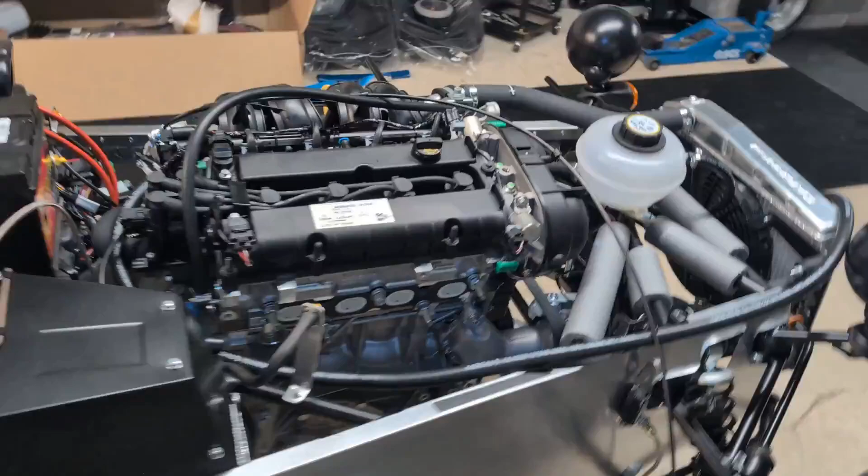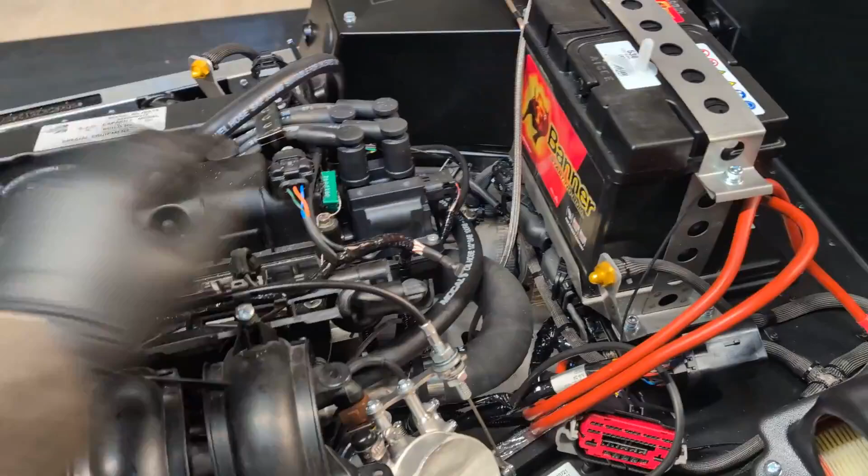It's quite a bit of the plumbing done, quite a bit still to go. Connected a few of the loom connections and whatever else, but again, still some work to do. Throttle cables kind of roughly mapped out. But yeah, still some work to do up in the engine bay, but the kind of stuff that we needed many hands for is hopefully done on that front.

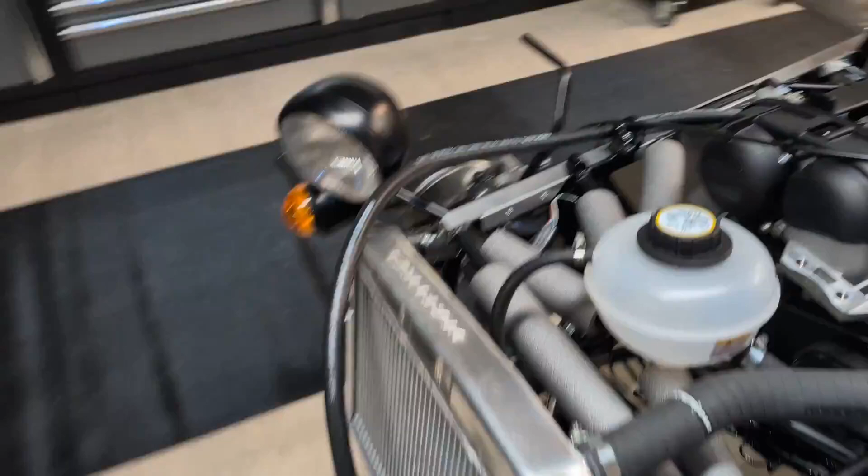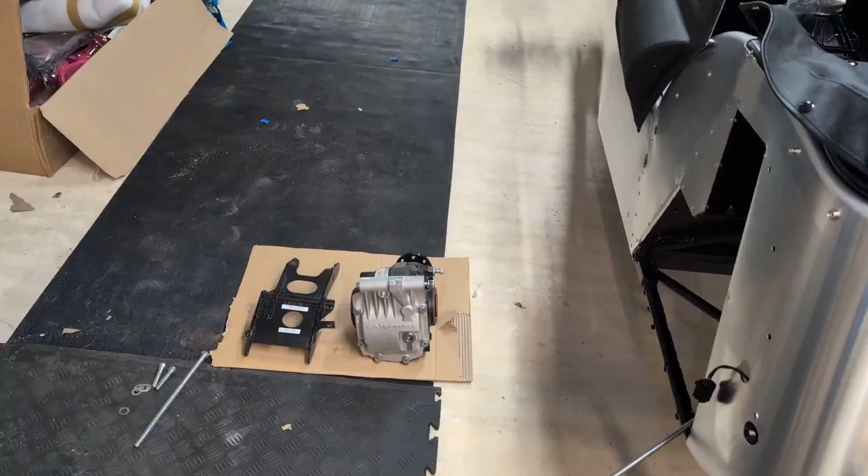Spent the last hour or so of the engine install day playing around with the rear diff. It's one of the things you'll read about and hear about a lot if you're building a Caterham. It's mainly because the thing's so heavy, it weighs a ton, so getting it lined up when you're supporting that weight is not the easiest.

We had to play around with a few things last night, and some of them, even though they're not in yet, I can tell already are pretty good things to bear in mind, pretty good tips. So I'll document them here, and if they turn out to be nonsense, after I've fitted the diff, I'll come back and correct myself.

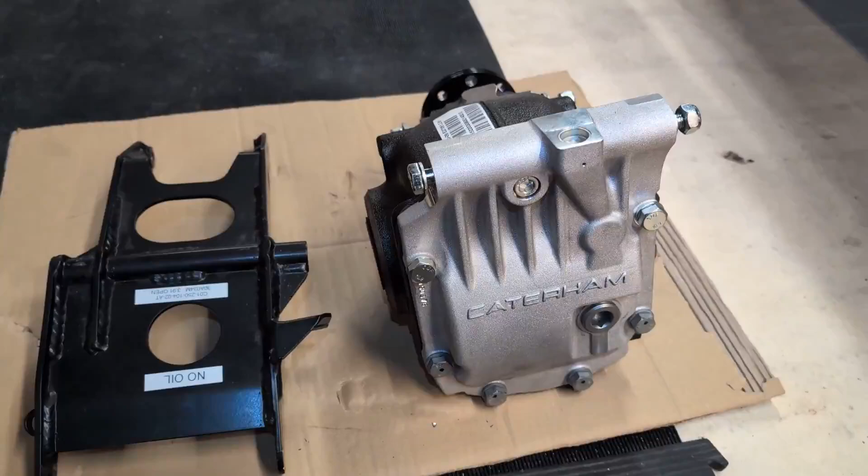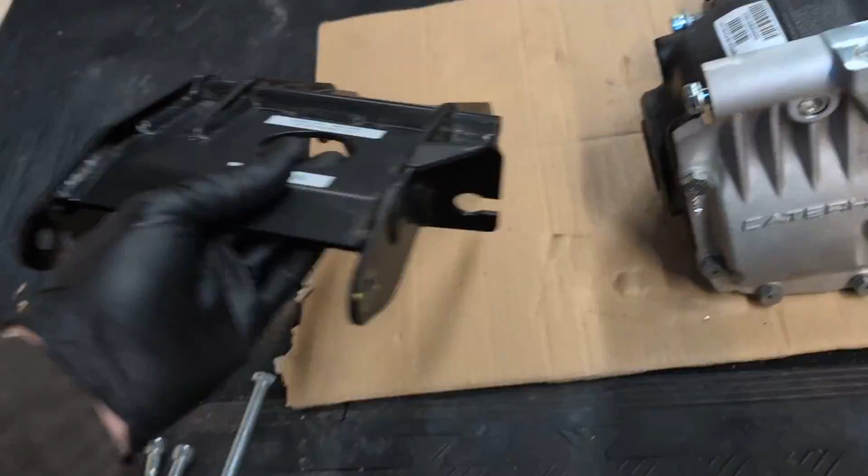So the first thing is, this is a BMW differential. I think the legacy, for years and years, Caterham's used a Sierra diff, so the dimensions and the bolt pattern and stuff are obviously different. So what the BMW diff comes with is this cradle to effectively adapt it out to the dimensions of the Sierra diff. So this is what we want to be bolting to the car, and the diff bolts into this.

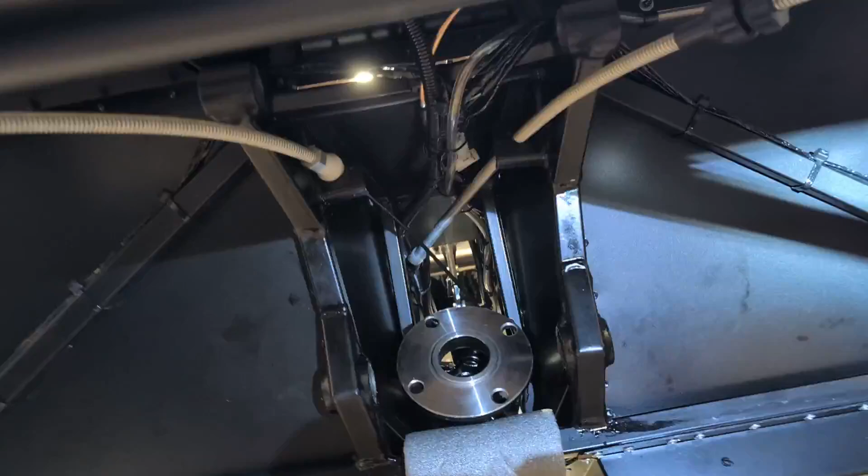Now, even with this adapter, it's too narrow for the bracket. So what that's bolting into is this chassis here. You can see there's these two bushes up here, and then two threaded holes down at the bottom, and then of course it will mate up with the prop shaft.

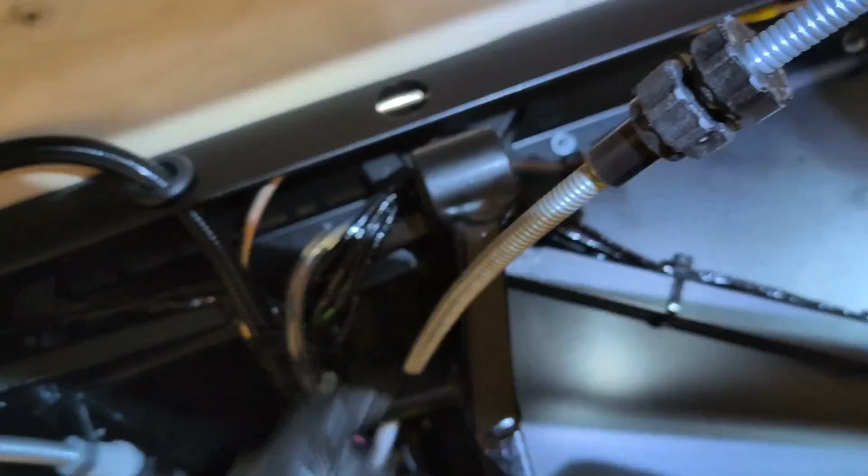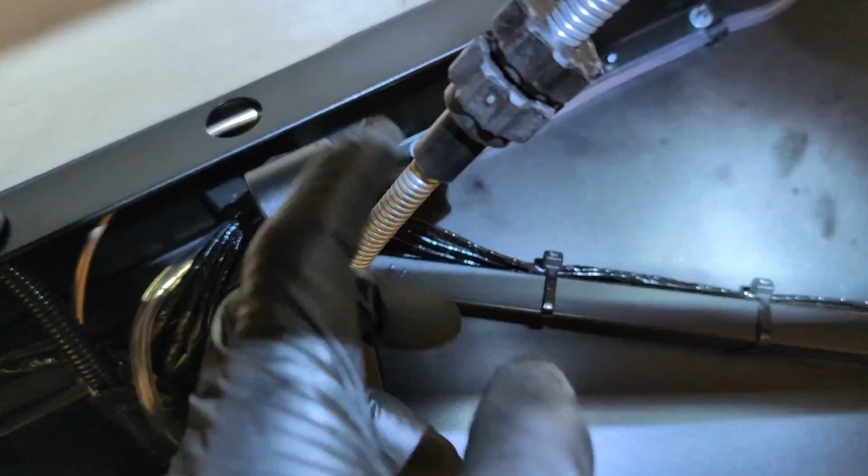Quick note on the handbrake cable. In the chassis, there's a nice little bracket which looks fairly standard for a handbrake cable. So the initial thought was to wind the adjuster sleeve into that gap there. But when we did the first test fit of the diff, we found that was fouling on the cradle, and we couldn't get the diff up into position.

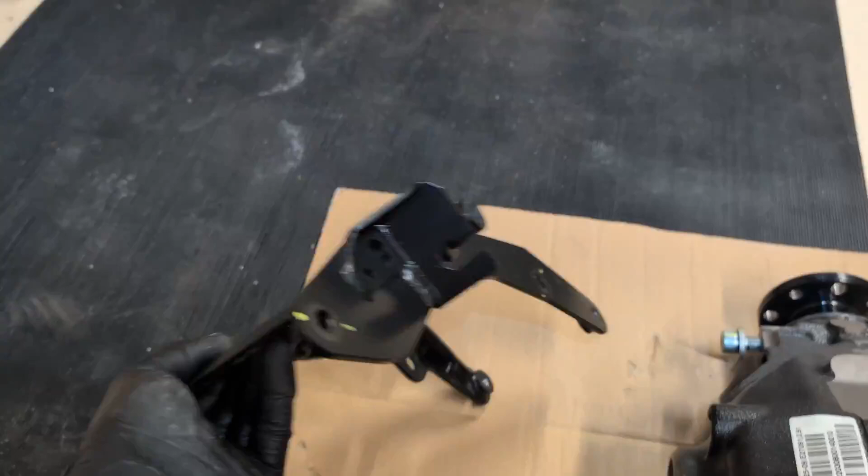It was only later when we realised, on the cradle there's another slot there, so the adjuster comes way back - that's my only assumption. The manual is just so ambiguous for this. It basically has a picture of a diff, a picture of a pile of washers, and that's it.

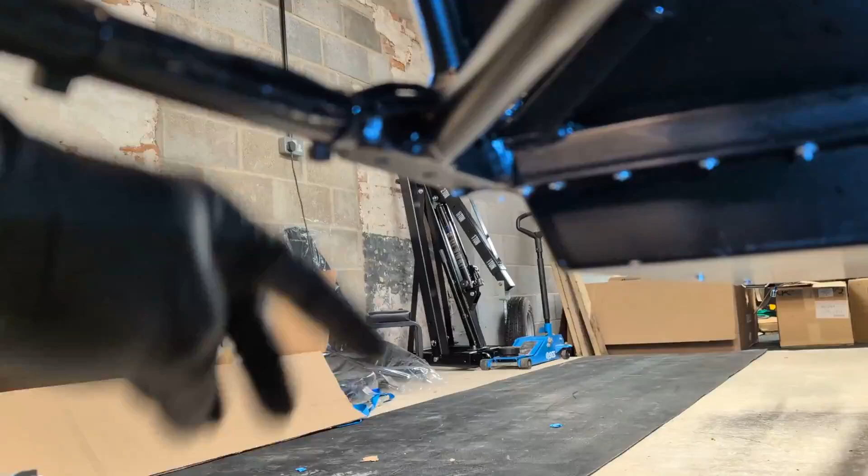I'm going to use a couple of spirit levels, clamp them to this square section of chassis here, and then the same on the other side, and then basically find the centre - get an equal gap between the diff and each side. That seems to be the done thing.

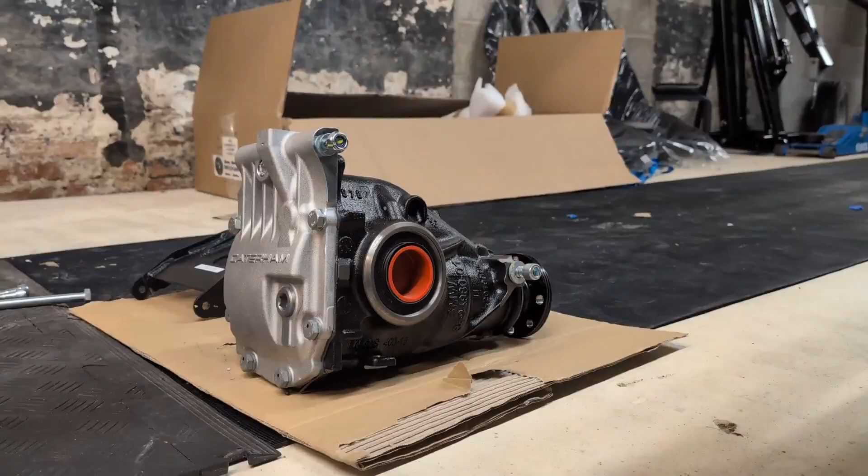I think within 5mm of centre is what you're aiming for, but you should be able to get it bang on with the shims. You get a bunch of shims of various thicknesses, so you should be able to get that bang on. Most people do this with the diff and the cradle attached - the cradle comes pre-attached to the diff - but it's a lot of work while you're figuring out the shim situation. So something, I didn't think of it myself, I read it on some blog or watched it on YouTube.

Sorry, I can't remember the link or anything.

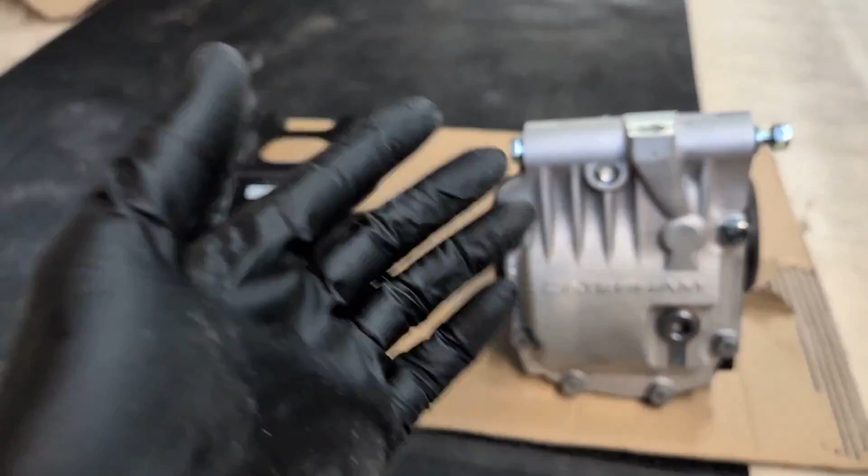The chap building that car just took the cradle off, and that allowed him to get the spacing right with just the cradle in place, which makes sense. Once you've figured out what shims you need at either side, you can either take the cradle back out, bolt it to the diff, and put the whole thing in with the noted number of shims, or potentially leave the cradle bolted up and jack the diff up into it.

Not sure if that'll work. I might as well try it.

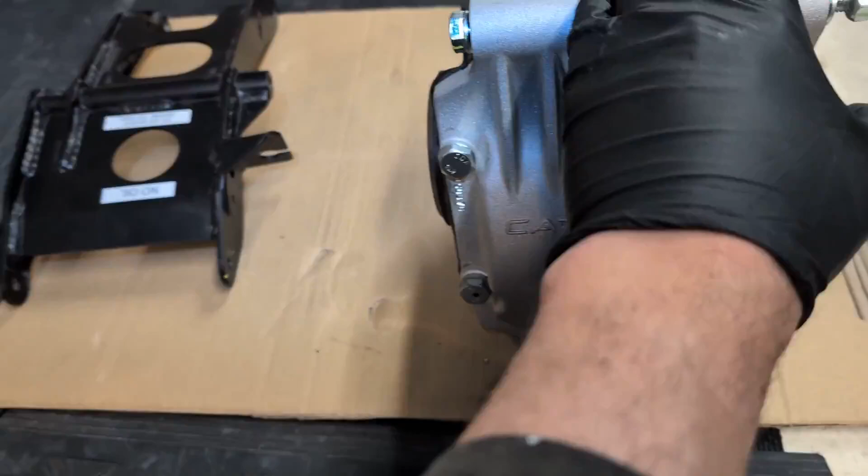It comes without oil in it. Apparently it's quite difficult to get the oil in — or difficult is probably a strong word, but it's slightly easier to get the oil in while the diff's off the car. I'm assuming that's the fill plug. I might do that.

Now, put the diff oil in. Then at least it's done. It's only 800ml, I think, so it's not going to make it much heavier.

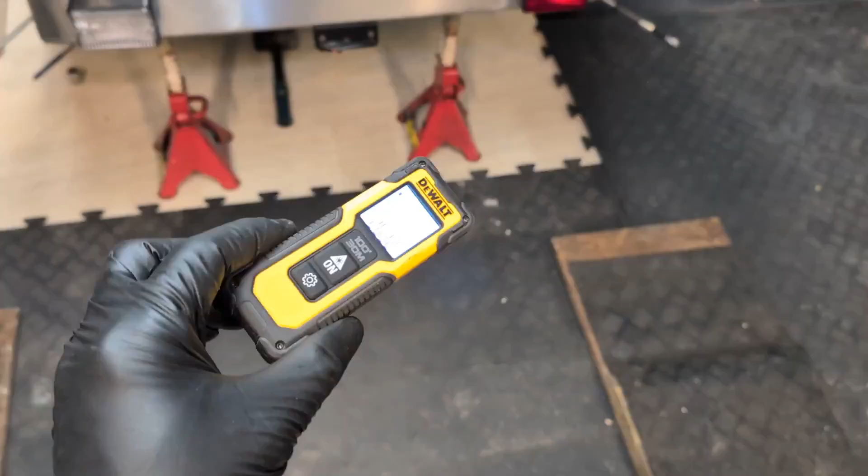Okay, welcome back. Just doing a little bit of measuring. This is the second cheapest laser measure thing on Amazon, so I'll probably calibrate with something else, but I've taken a few readings. I've got the cradle in.

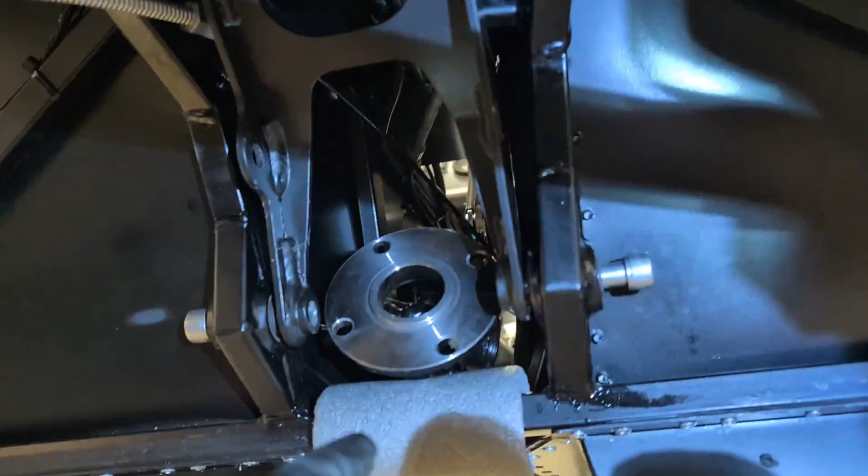Got to be honest, even just the cradle on its own was a tough one to get in. The big 11-inch bolt that goes right across — I could not get it in that way, but I could get it in this way.

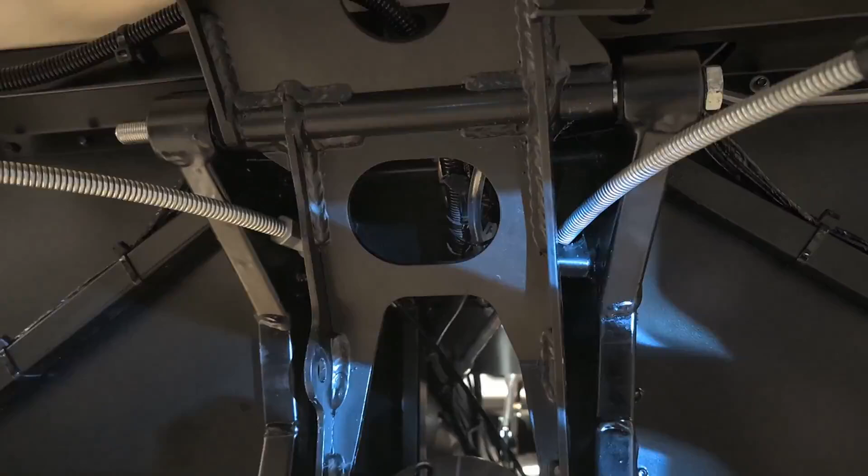There's actually a good tip I got from Richard, aka Maverick, so thanks for that. That bolt's actually not straight, which sounds weird, but that huge bolt is very slightly angled, meaning it's only got one orientation where it'll smoothly go through the diff and the two bushes. Even with that in mind, it was quite tough to get in.

Anyway, once it's in, it doesn't freely shunt side to side. I just feel like the whole thing is slightly out of tolerance. If everything was straight and perfectly lined up, in theory this whole assembly should rattle backwards and forwards quite easily because it's just bolts in bushes, right? But it doesn't — it will move with the help of a mallet.

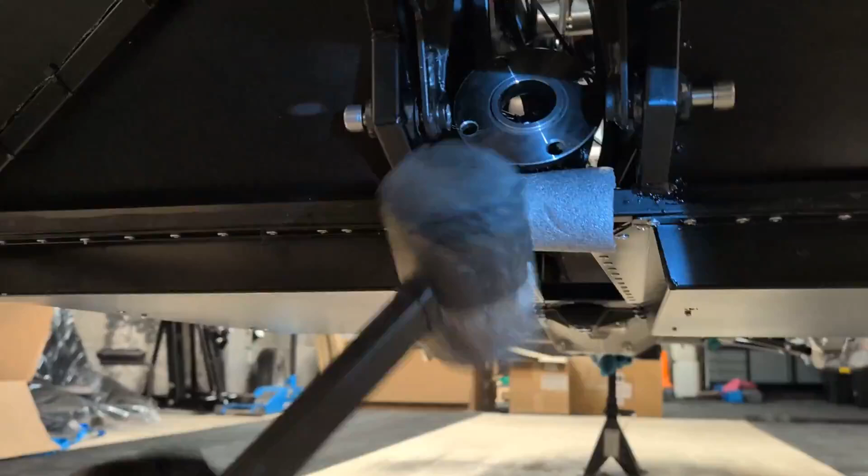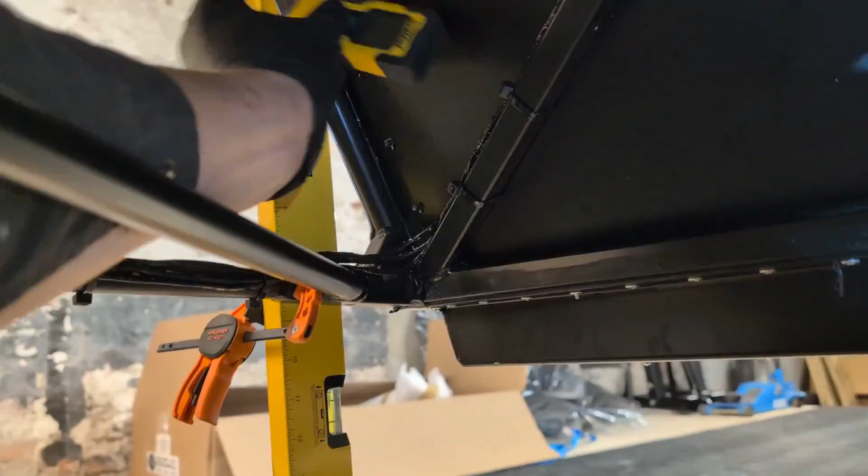So what I've done is shunted it back and forth a little bit, and I've got these spirit levels clamped to either chassis rail to give me something to measure from. I've also taken a second measurement from around here, between those two rivets on each side, and I get the same measurement side to side.

So I'm fairly happy that it's centered, and that I now know what my reference measurements need to be. I now need to take all these bolts out, figure out how many shims I need in these gaps, so that when it all gets torqued up, it's in this same alignment.

Going back to my earlier point about whether I do that with the cradle in or not, I'm now beginning to doubt whether it's a good idea, because this whole assembly does have a little bit of flex in it. Whereas if it was bolted to the diff, it would be a lot more robust. So maybe I need to be taking these measurements with the diff inside the cradle.

But it can't hurt to get close like this, and then I can put the diff in, and if it's just off a little bit, I know it'll just be one or two shims either way. So anyway, I'll report back probably tomorrow now, because I can't be bothered messing with the diff now.

Okay, one last update for tonight. So these are the 3 sizes of shims you get, and then the 4 lock washers for later.

So we've got thick ones, medium ones, and then little tiny thin shims over here. So what I've been doing is I've been under the car. I've got 2 reference points now.

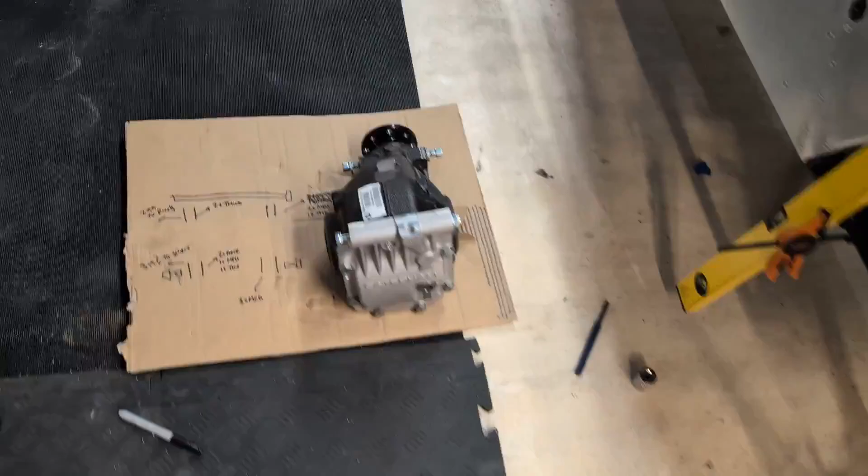So it's 299mm to, I say 2 rivets, but there's just a slot between 2 rivets. I can put my laser measure so it's consistent on each side, and then it's 319.5 to where the spirit levels are mounted on each side.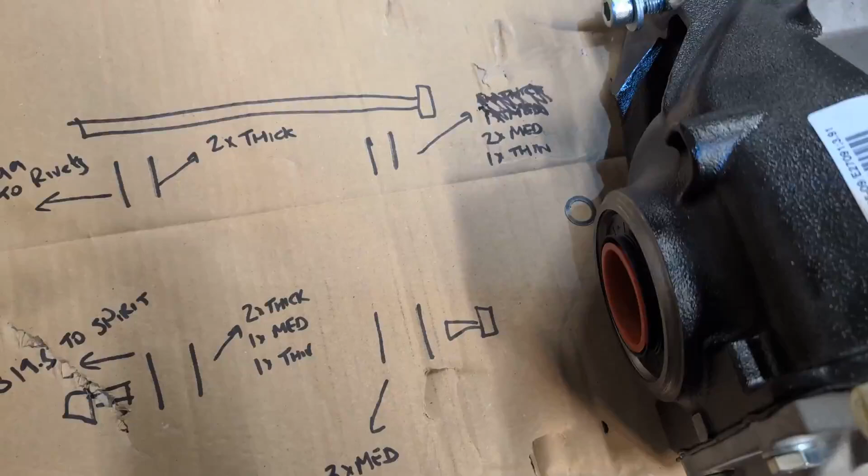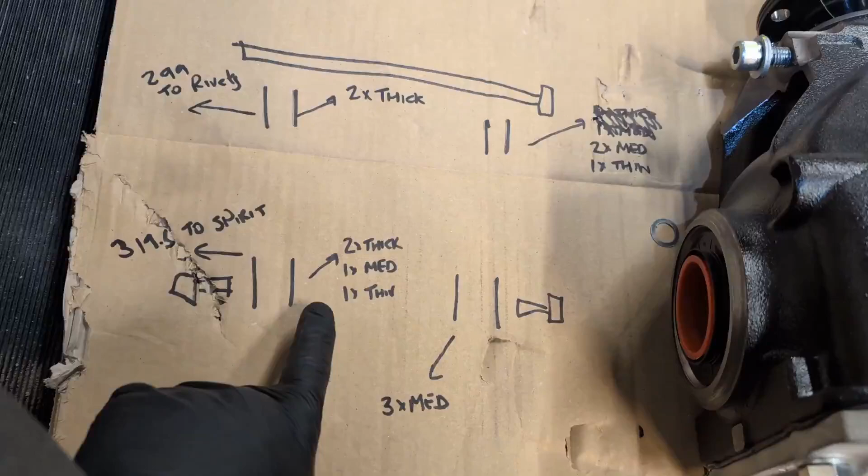So with just the cage in place underneath, I've worked out that this side needs 2 thick washers, this one needs 2 medium and a thin, this one 3 medium, and this one 2 thick, 1 medium and 1 thin.

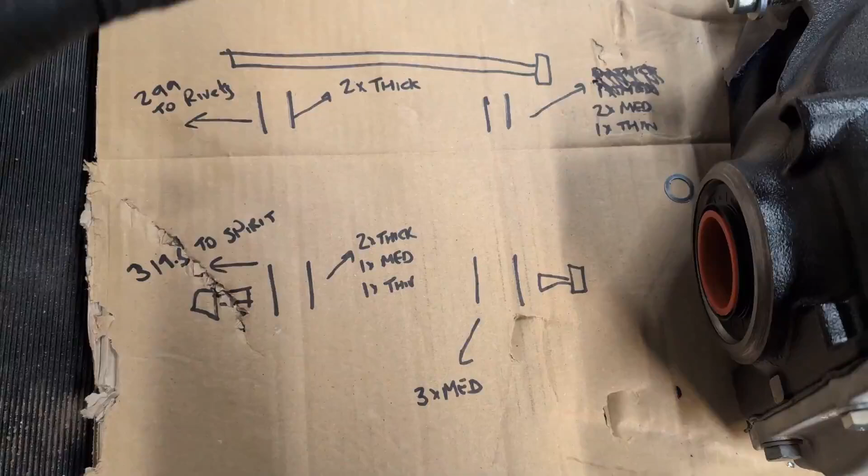And with those washers all wedged in place, the cage holds itself in there with no bolts in. So that tells me it's pretty flush, and while still being able to get them in, there's no side-to-side movement on it.

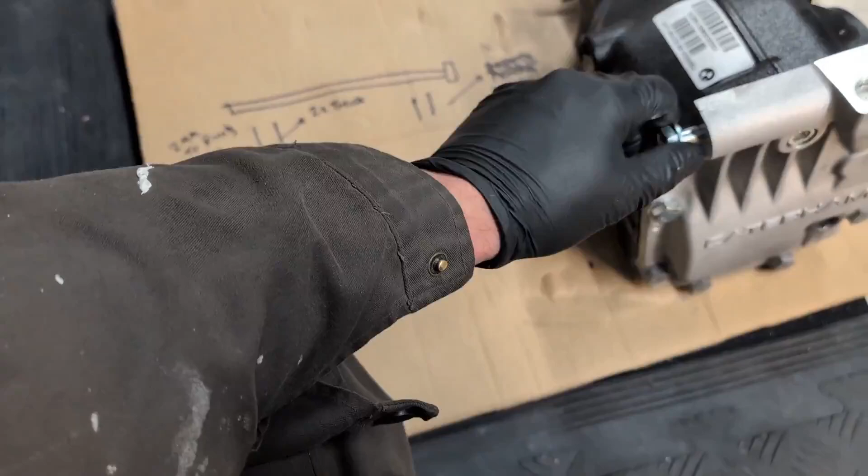So tomorrow I'm going to bolt the cradle in without the diff, with all of those shims, take all my measurements again, make sure everything checks out. And if that's the case, I'll then gauge the viability of jacking this up into the cradle, or whether the cradle needs to come back down again. I won't know really until I try it.

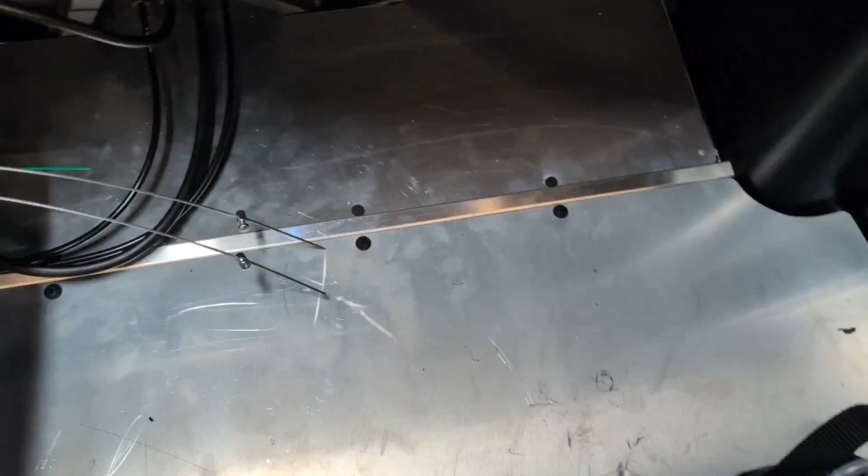Probably safer to use a second pair of hands for that. A lot of the YouTube videos and stuff that I've watched for the non-racing cars, they just take this front bit of boot panel out. I mean, I could do. It's only just moving the extinguisher out of the way. I don't know, I just don't think I want to play with that.

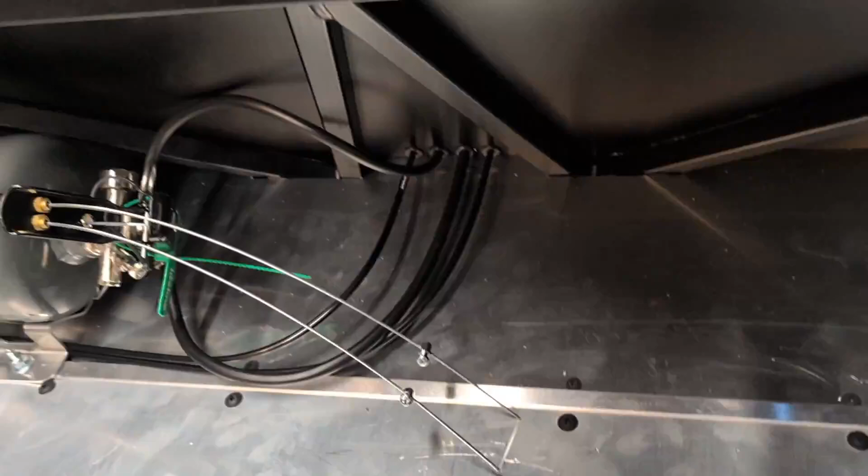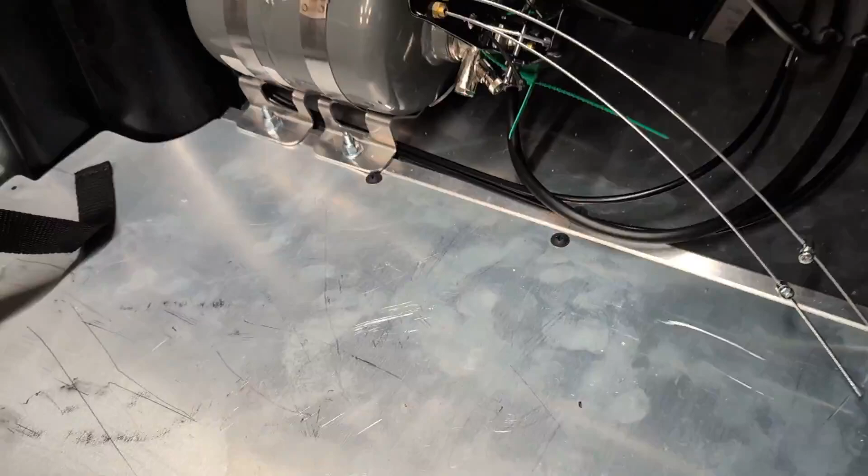So what they would do is they would then drop the engine crane down through here and use that to pull the diff up, but I just don't fancy it. I don't fancy messing around with that extinguisher, so I'll just do the trolley jack version, which probably means I'll need to grab a helping hand, but we'll see how it goes.

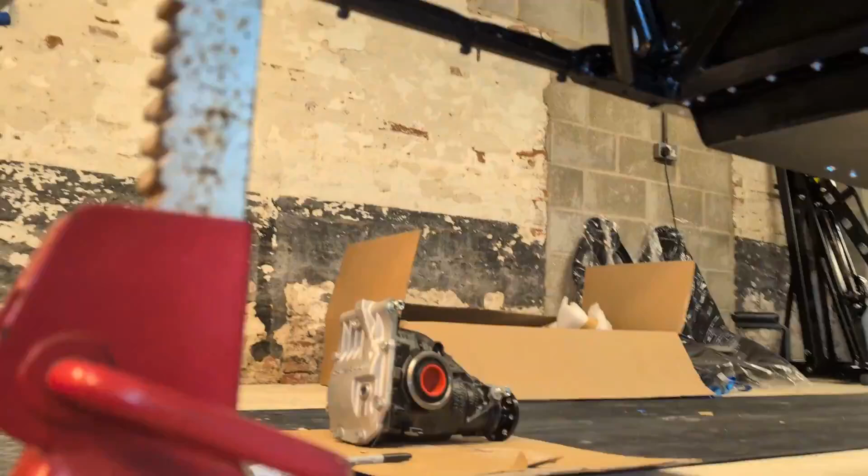And the measurements all still work out to my reference points, so I'm happy that's centered now. The only thing I'm not sure about now is whether the diff will slide into that cradle or not. It should go in, but it's pretty heavy.

I've just been lumping it around the garage, I'm pretty out of breath, so I'll come back and do that another day when I've got some help.

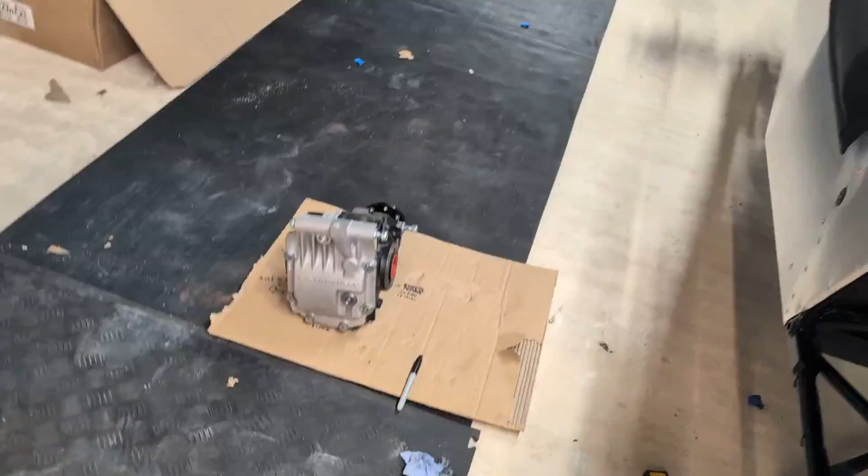We'll see. Anyway, track day later this week at Silverstone in the Lotus, so kind of all eyes on that for now. My last one of the year, unless I can get out in this car before Christmas, which will be nice.